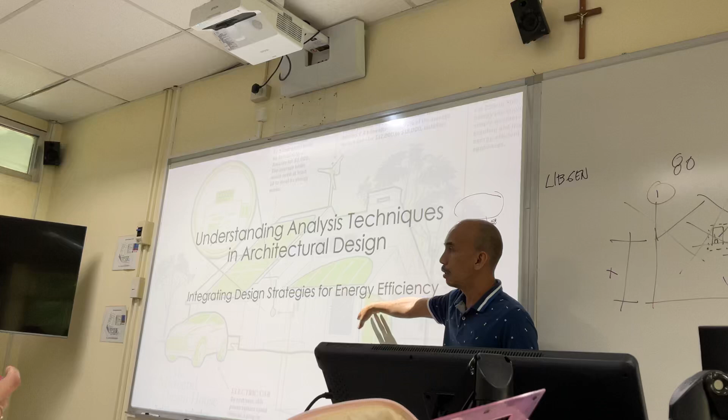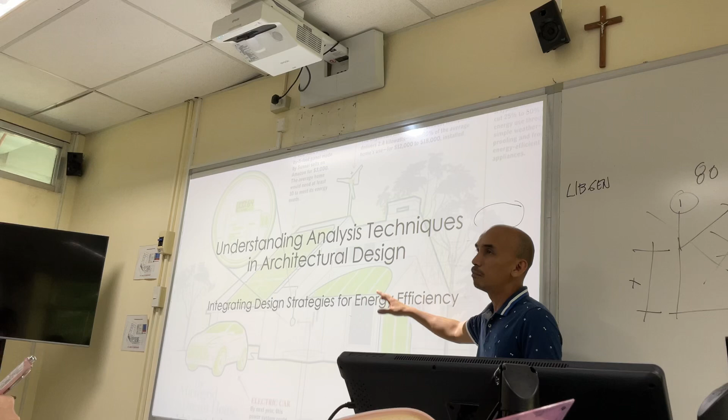Civil engineering is for structural integrity, but also other engineers develop technology before they become useful in society, which includes mechanical, industrial, and so on.

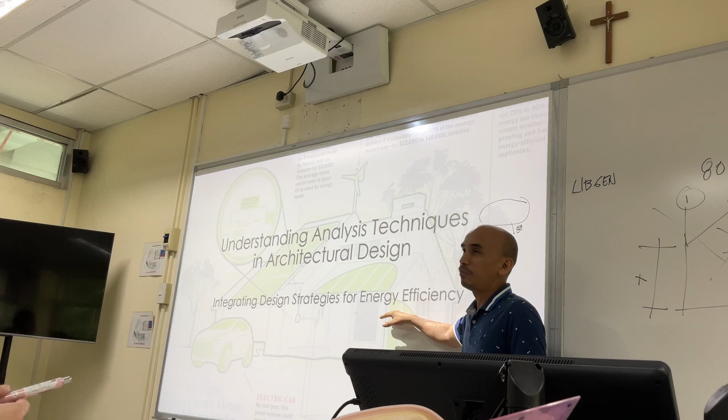But of course, when we reach modern times, energy is no longer sufficient, so we try to reduce consumption. That's why we need energy efficiency. And energy efficiency isn't necessarily mechanical - it doesn't need putting up or developing a machine. For us, it's passive.

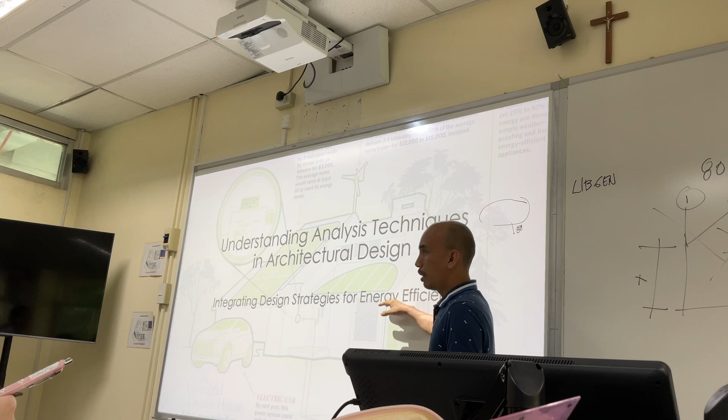So, why do analysis techniques matter? Why indeed? So, that's it.

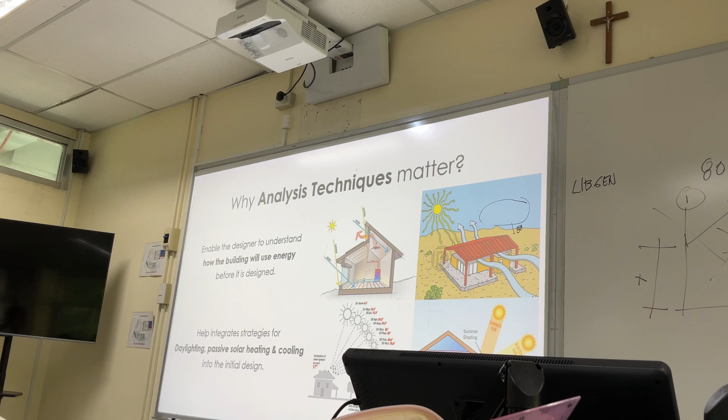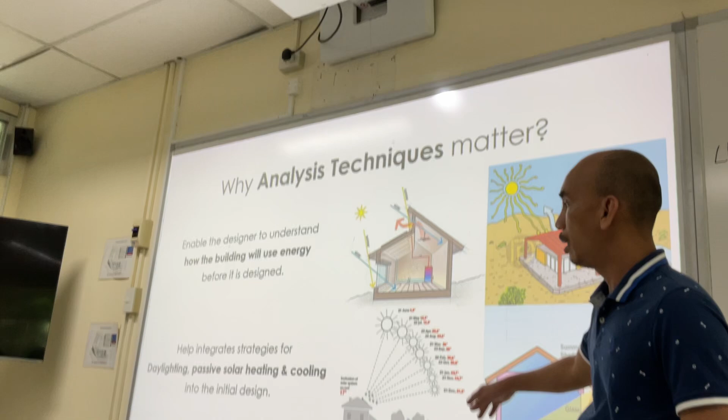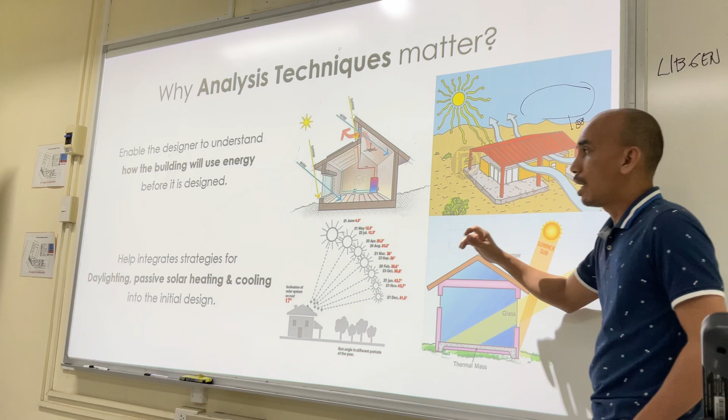The designer should understand how buildings will use energy and integrate strategies for daylighting, passive solar heating, and cooling. Normally in the Philippines, there are only two weather types, rainy and hot. In the US, they have 4 seasons. So for us, we need to maximize energy efficiency so that our electricity or water consumption doesn't increase.

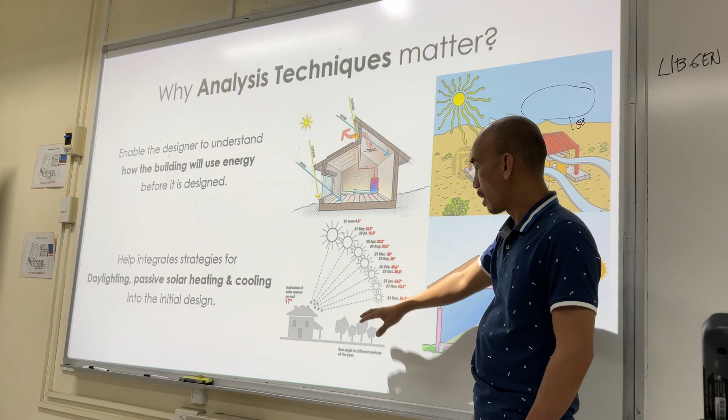Passive energy - aside from solar panels, you can also use large windows. So what window type do you think is very efficient?

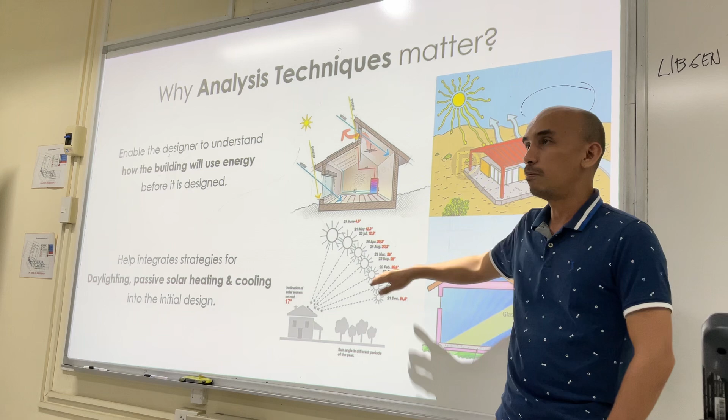So of course, the one who profits is the power company. But we can do something about that since we study architecture.

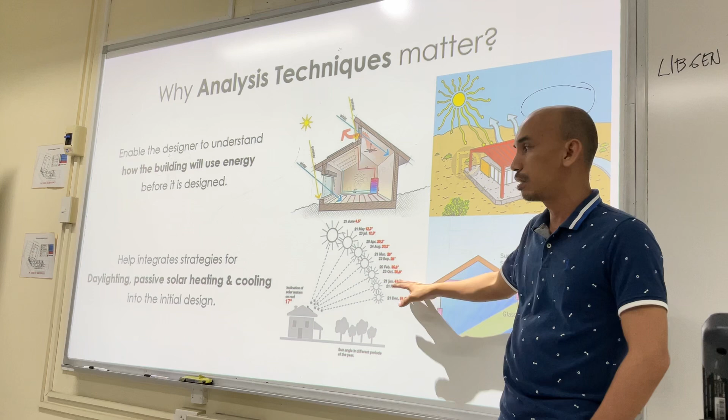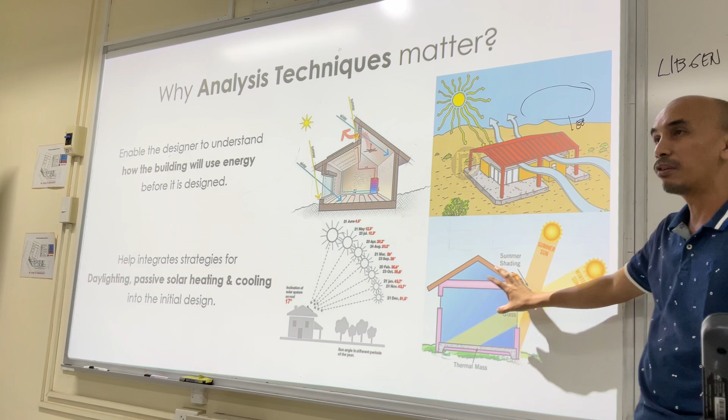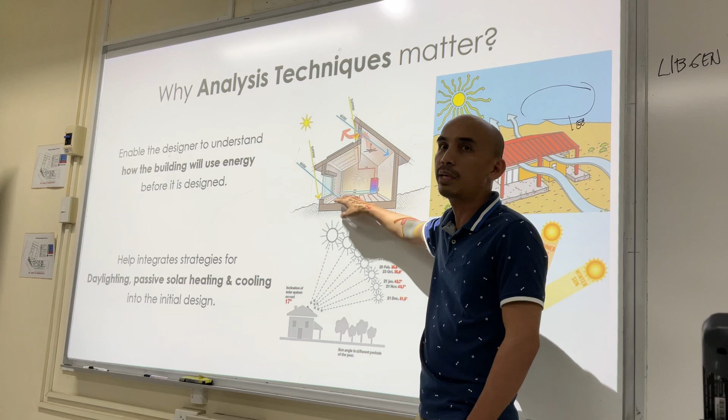Also, you should understand the flow of air and solar heat - instead of using small windows, you can use large windows. And there's a difference between a window on the wall versus one higher up. Normally, in physics, hot air goes up and cold air goes down - use that law of physics, it's math again in your studies.

There's still some math involved. Now, next is my problem.

Of course, the problem for us students is for you to be creative to solve it so you get a solution and a grade. But when you practice, the more problems you encounter and solve, the more projects you solve, the more money you make. If not, no money. So, variables mean the innovative solution or approach you can incorporate to find an effective solution.

Now, every site, every location requires a different solution. Let's say Baguio, Cebu, and Davao - different approaches or variables need to be considered. So you take note of the important variables and their relative importance.

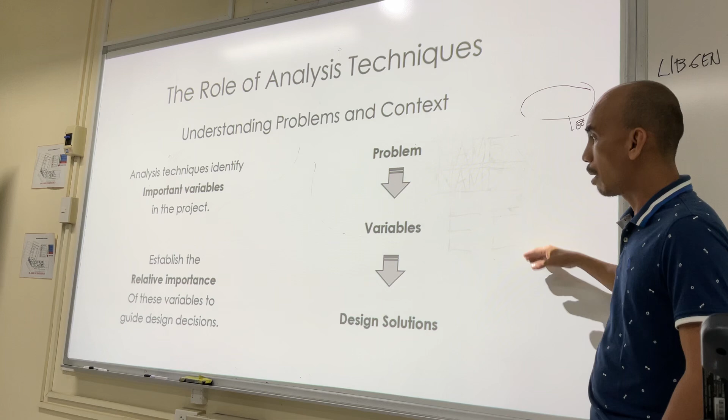Meaning, there are requirements, for example spaces and other requirements that need to be provided.

Okay, and next, as discussed, you start with forms. Residential could be simple - box type, which you'll often see on Facebook, seems like anyone could make it. But in architecture, it's more than that.

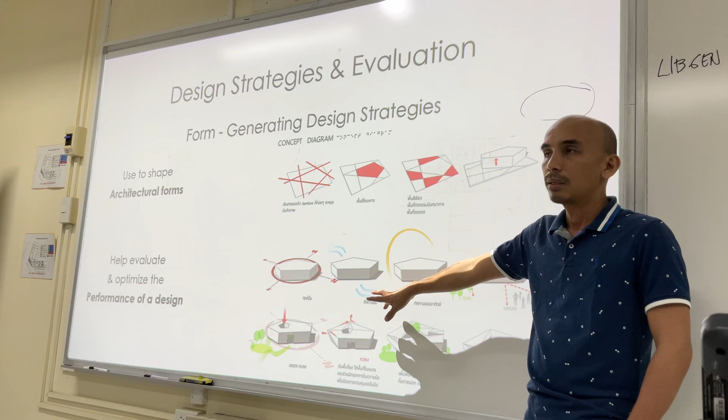There's a study on how to optimize performance or help evaluate and optimize the performance of a design approach. With consideration of north or bearing, wind, solar path, then the user, and environmental parameters or sustainability requirements, and the final output.

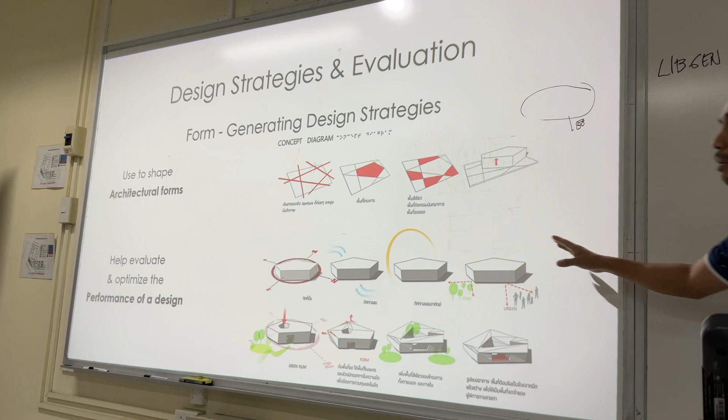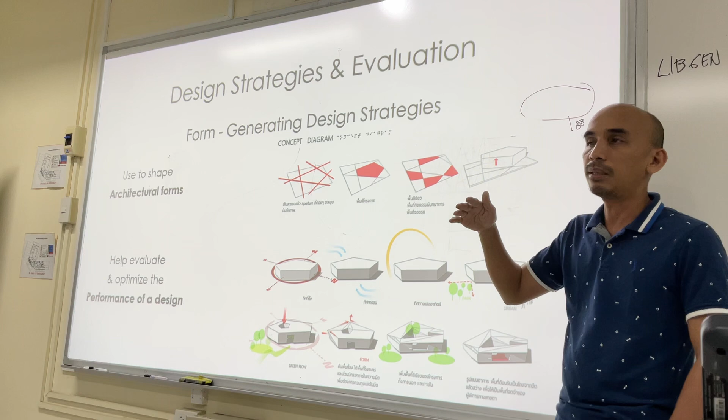By the way, when you design projects, make sure you provide what is needed - not preference or wants. Wants come after the needs are provided. In architectural guidelines, books and references, the need is the basis, because preference might differ from person to person, making it hard to decide whose preference to follow.

Excuse me. Hello? Yes po sir. Okay, sir. Yes, sir. Sir, can I call you after 1 hour? I have a class right now. Okay, thank you.

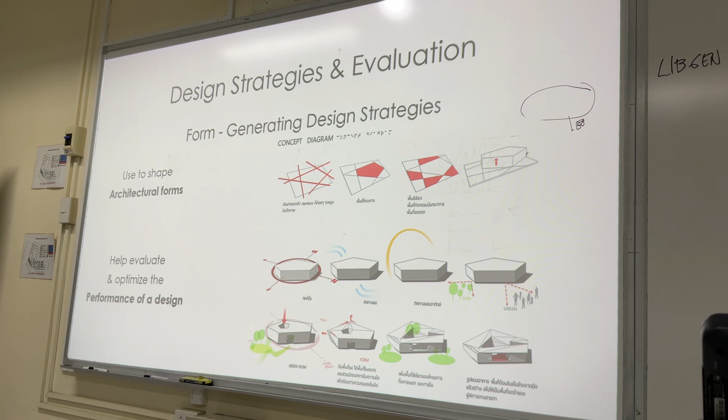So that's it. Questions so far? Is it okay? None? Alright, let's continue. So, 5 groups of analysis techniques.

That need to be used or approached. First is climate as a context, understanding environmental conditions. Although the Philippines has only 2 seasons, you have to consider when it's rainy season and sunny, because we have to maximize rainwater collection, sun path, and temperature or humidity. That's why it's called climate.

Programs and use - studying how spaces will be utilized: bedroom, master's bedroom, kitchen, and so on, especially for commercial, medical, and other types. Next is form and envelope - of course, architects design buildings with the shape of external features.

Part din siya sa ating development. And number 4 is i-combine yung tatlo, to provide or make a final output na maganda or good design. A design can only be labeled as good if ma-address niya yung mga concern. Kahit na maganda lang siya aesthetics, pero ang function niya ay hindi, hindi siya good design.

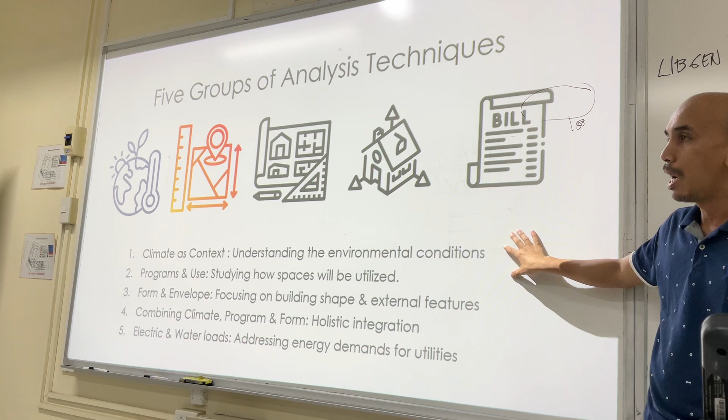Minsan din masabi nyo na minimal lang yung design, minimalist, but ang function is na-serve, so kaya siya best. People don't appreciate yung simple design kasi hindi nila alam kung ano yung purpose bakit ganun lang yung design. So it's your task to educate yung mga tao, mga clients.

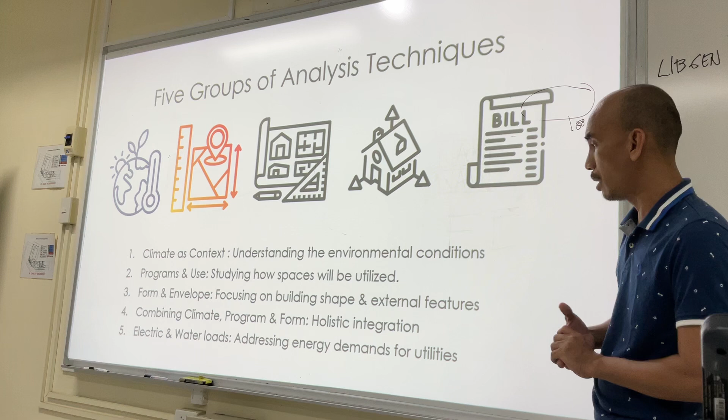Then, of course, yung electric and water loads, addressing yung energy consumption or reducing energy consumption.

So sun path, wind direction, precipitation patterns, and building orientation, adapting building orientation and materials for local climate. Normally, when you do design, the current designers, or not designers but rather contractors, opt to buy mga import products, you know, from China, US, France para gamitin dito.

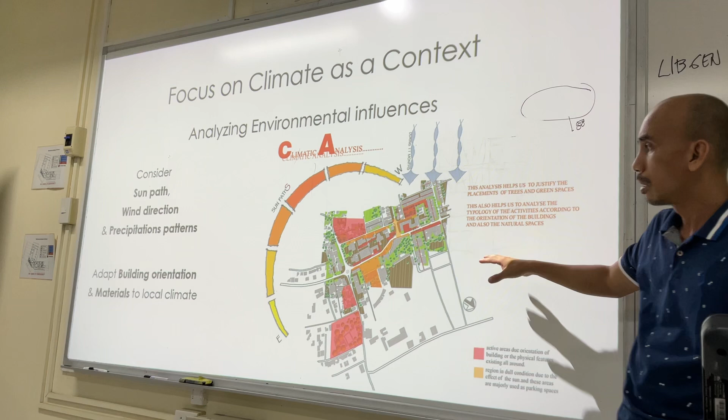But Filipino architects, or us, you students, use the local products para ma-identify as may identity na local siya na architecture, kasi nawawala na yung essence ng Filipino architecture, puro lang ma-influence sa mga Western or Asian countries.

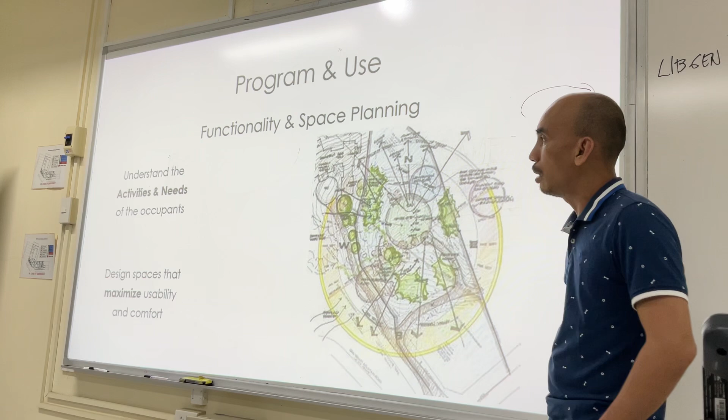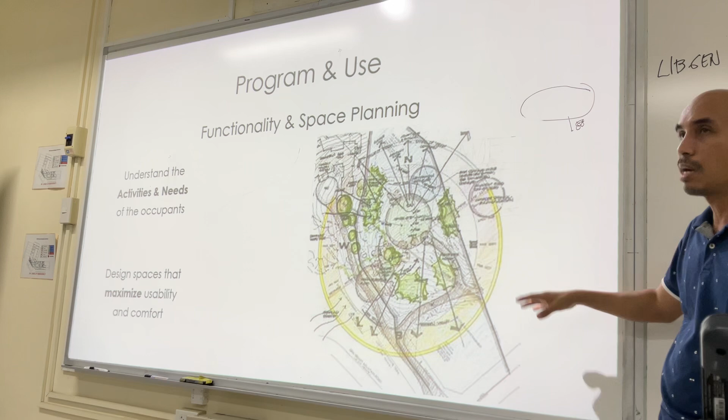Now, functionality and space planning, as mentioned earlier, understand the activities and needs. For example, your client's activity is mahilig siya mag-bicycle, mag-rides. So anong amenities na i-provide ninyo for him? Like yung parking space para sa bikes, tool room or workshop para makapag-component siya, kasi need yun niya ginagawa niya yung biking activity.

Nag-practice siya, yun yung requirements sa kanya. And then maximize space, usability and comfort. Of course sa ngayon, I think maluwag man yung space o comfortable, yung ibang nakatulog na. Next, form.

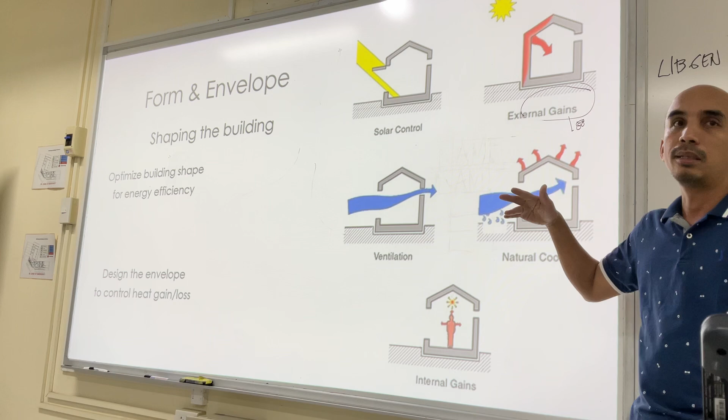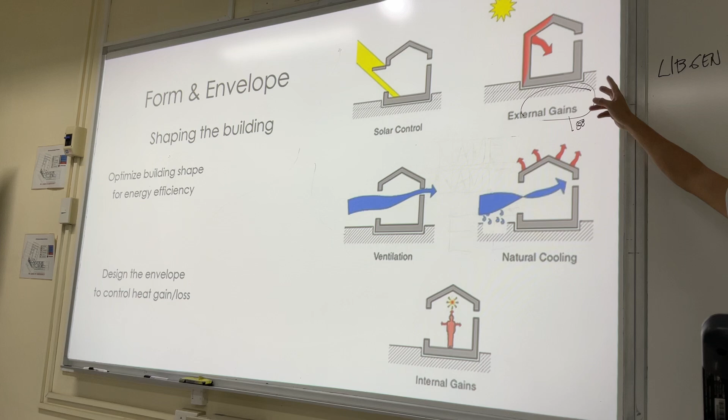So shape niyo yung building or orientation to maximize energy efficiency. Of course, yung opening should not face direct sunlight, unless otherwise yun yung purpose ninyo, kasi pag direct sunlight siya, meron siyang external heat gain, at meron ding internal heat gain, like yung mga tao, na occupants.

Kasi mapansin ninyo, pag kayo lang mag-isa tapos naka-on ang aircon, malamig masyado. Whereas pag madami, same temperature, kaya lang ma-absorb, parang hindi masyadong malamig, di ba? So yun.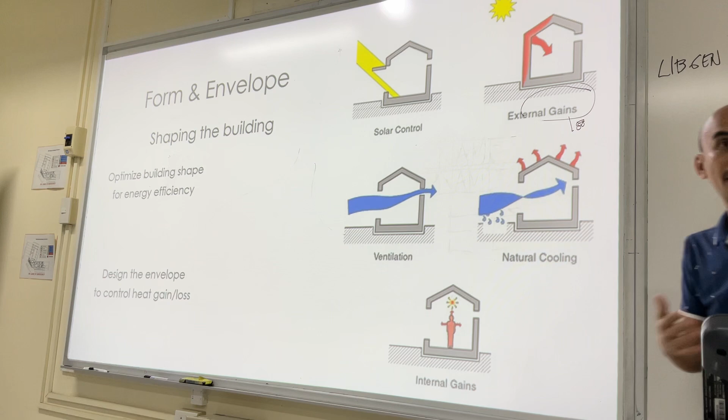Next, holistic integration, meaning development strategies, mitigation, and adaptation is a requirement to complete the climate compatible development design. So ibig sabihin, holistic yung approach. Sustainable design, although hindi siya necessary na mag-develop talaga kayo ng design process, but somehow meron lang kayong idea, kasi yan na yung steps for second year, third year, and so on, na pabalik-balik lang yun siya.

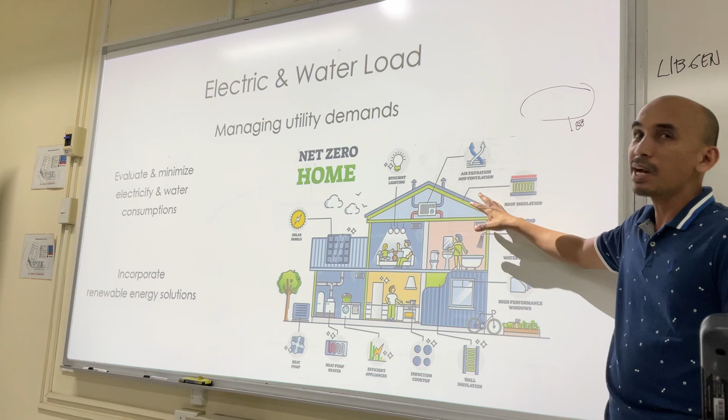Of course, ang goal is to have net zero home, solution na as much as possible ma-minimize yung energy consumption, kasi the more na nagagamit kayo ng energy, mas mahal yung bill na tubig, kuryente, kung mapansin nyo. Unless otherwise, kayo yung hindi nagbabayad, so parents ninyo nagreklamo na mahal yung kuryente. Pero kapag kayo na yung nagbayad ng kuryente, ma-feel nyo na yun siya, adulthood. So as an architect, make sure na ma-utilize nyo yung energy consumption or ma-reduce.

So activity, minor plate. Okay, again, relax lang muna. Okay, so activity is...

Using your A3 with template, develop a conceptual design for a 2-story residential building with initial site analysis. As mentioned earlier, ano yung mga conceptual i-discuss natin, so yun, part din siya, with a total floor area of 200, yung building.

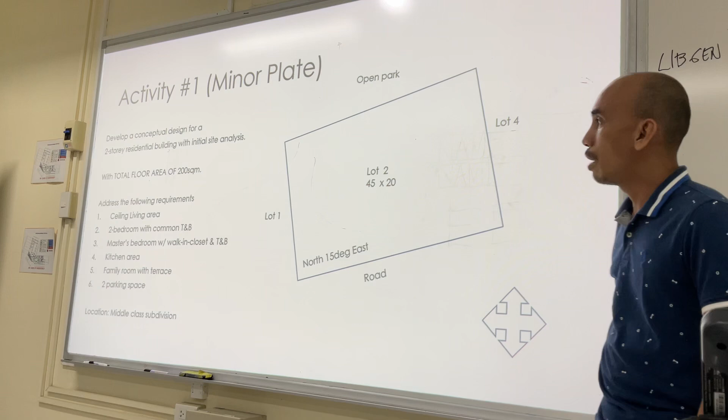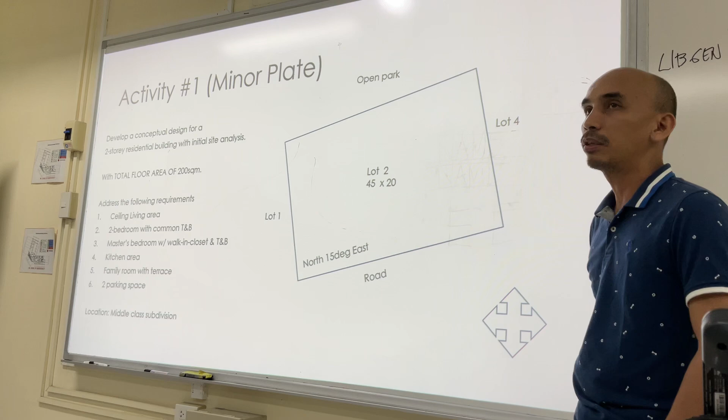Address the following requirements: provide living area with high ceiling, 2 bedrooms with comfort room, master's bedroom with walk-in closet and toilet and bath, kitchen area, family room with terrace, 2 parking spaces. Now, the 2 parking spaces are not included sa total floor area kasi nag-reduce pala siya, so mababawasan siya.

That was a question sa previous class. So normally, parking space is 1 slot is equivalent to 3 by 5, or 15 square meters, so times 2, that's 30 square meters. So you will add that to your total floor area. So total floor area is 230 square meters. Okay? Total floor area, nagets?

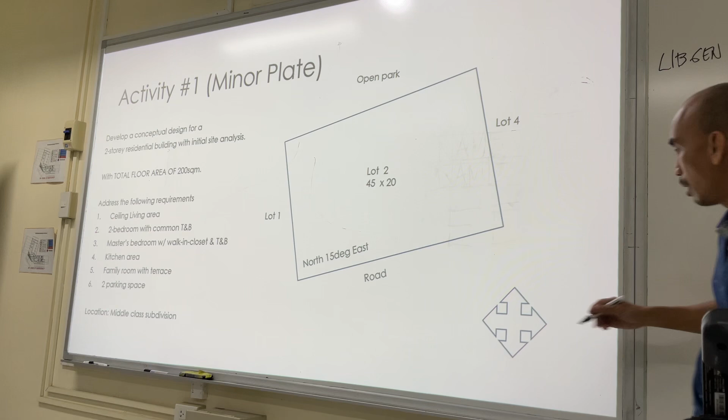And what, so ganito dyan, the north is dito na side, so consider this. Bidel, Luis, kindly take note na nandito yung north, kasi yung sa kabila, iba yung north orientation nila. Okay, para magbago yung inyong requirements, baka ako, kasi hindi rin ba na.

So the lot size is 45 by 20. Obvious naman siguro kung saan yung 20, saan yung 45. Hindi lang siya proportion, but somehow ganyan siya, nandito yung road. And then...

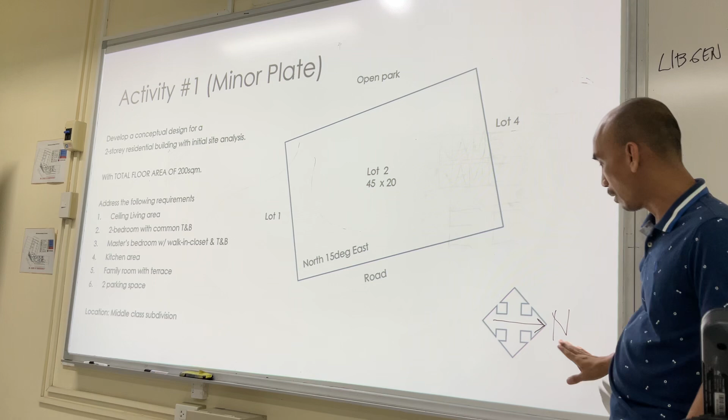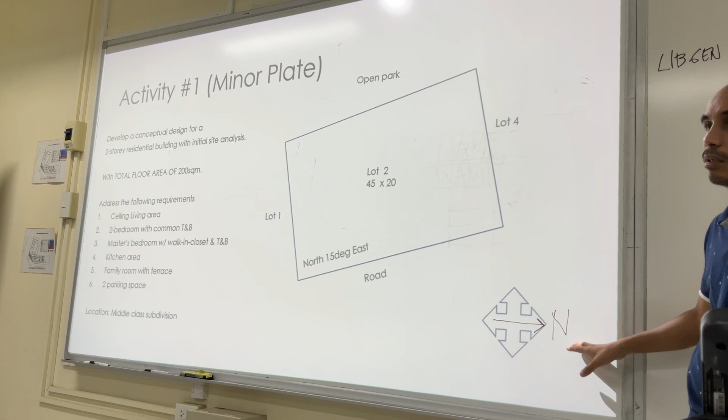Yung lot will be north 15 degrees east. Okay? So since nandito yung north, may protractor man kayo, try to figure out saan yung direction ng bahay, ano yung position, na ganito ba or vertical. Okay, so reference, this one, and then north.

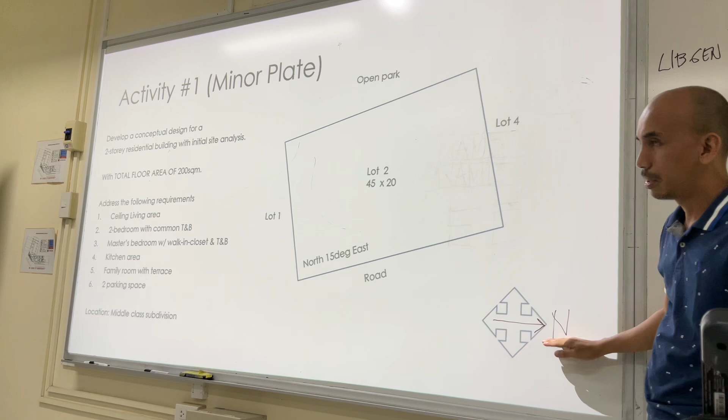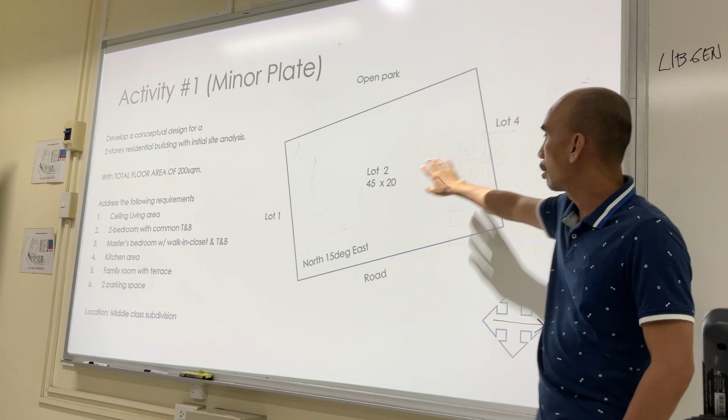Road is nasa harap, ito yung, of course, obviously, ito yung harap kasi nandito yung road, close sa lot 1 and 4, and then may open area sa likod. Okay? Nagets yung instruction? Question? Clarification?

Ngayon ba daw ipasa? Deadline will be 4 p.m. Until 4 ba? Yes sir, no, until 4. So deadline is 4 p.m.

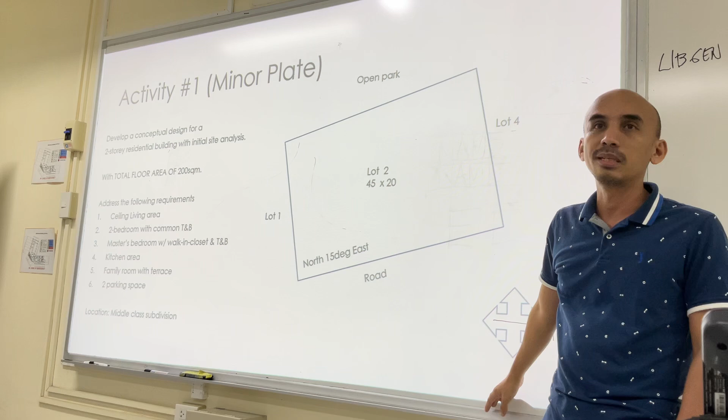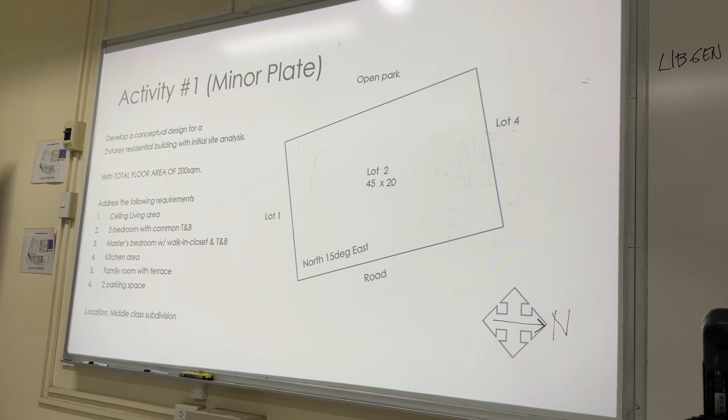Again, read the instruction carefully, what is asked. Read carefully yung activity, kung ano lang yung kailangan. Okay? And I'm sure kaya yan siya tapusin 1 to 2 hours.